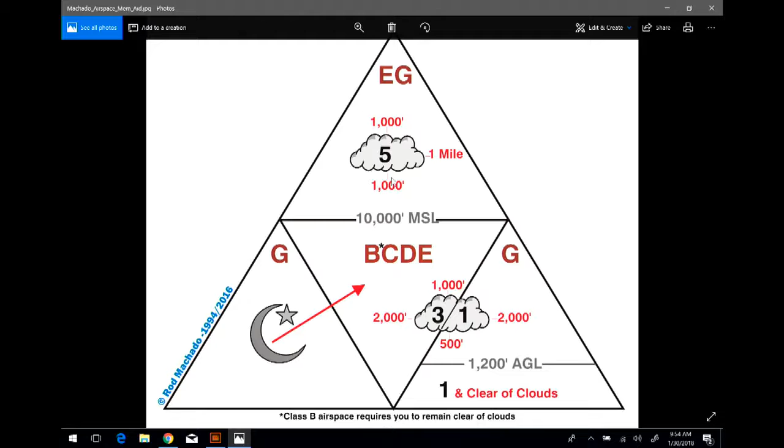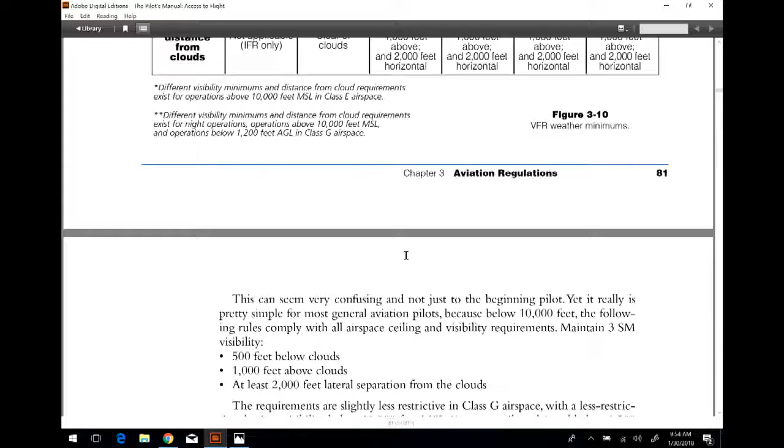So that's the Rod Machado pyramid, you can look at that. Another thing the text does is give it to you verbally - well, I say verbally, but from a text standpoint you can see it there, and just reread it.

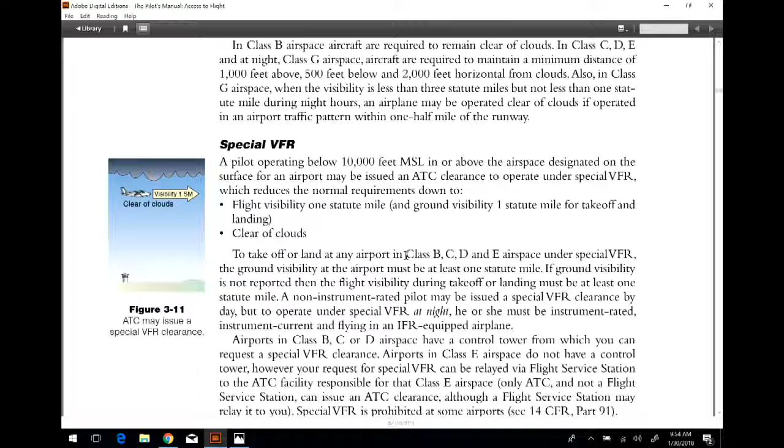Special VFR - remember you have to have permission for special VFR, and you need to know where on sectional charts to look to see if Class Bravo or Class Charlie airspace even offers special VFR, because in some cases it will say no SVFR. Special VFR is a tool of visual flight rules that allows you to get a little bit below the weather outlined in the basic VFR weather minima, to get you in and get you landing.

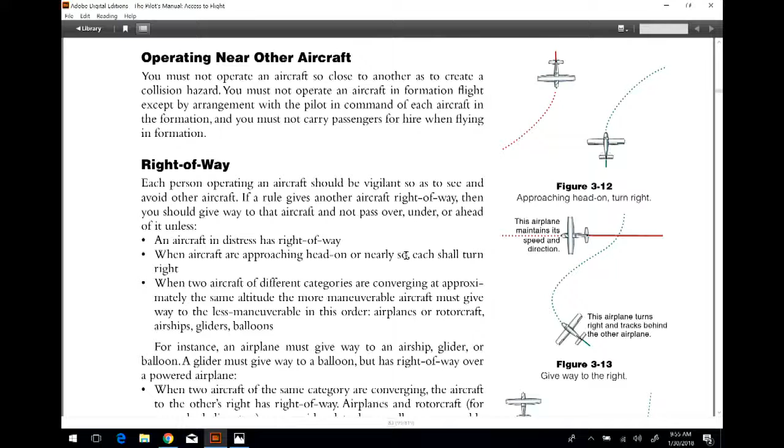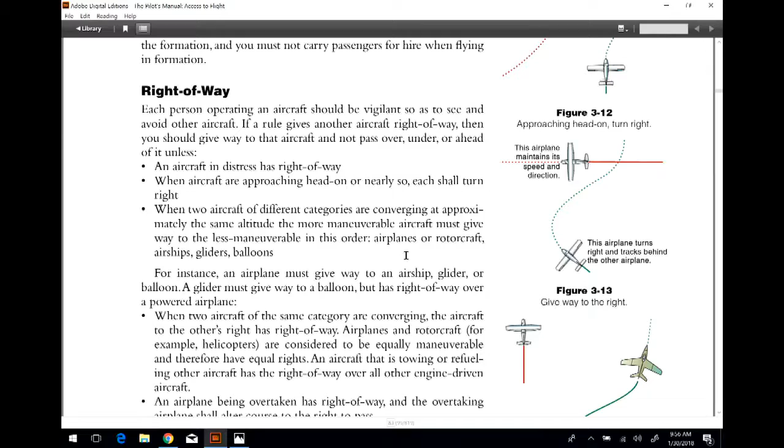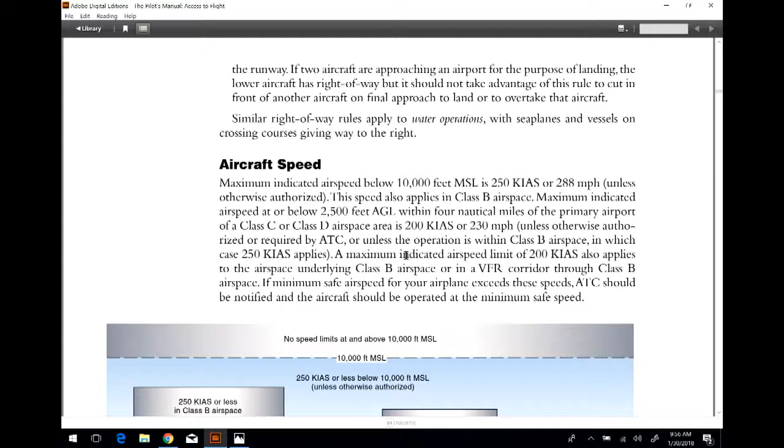It goes through the seat belts - just remember the seat belts. Operating near other aircraft, remember the right of way, and that right of way varies depending on the other types of aircraft you may have out there in your airspace. So read those and review what they are. Remember, there are speed limitations below 10,000 feet MSL, so keep in mind where those are, what the classifications mean, and how they relate to the speed limits.

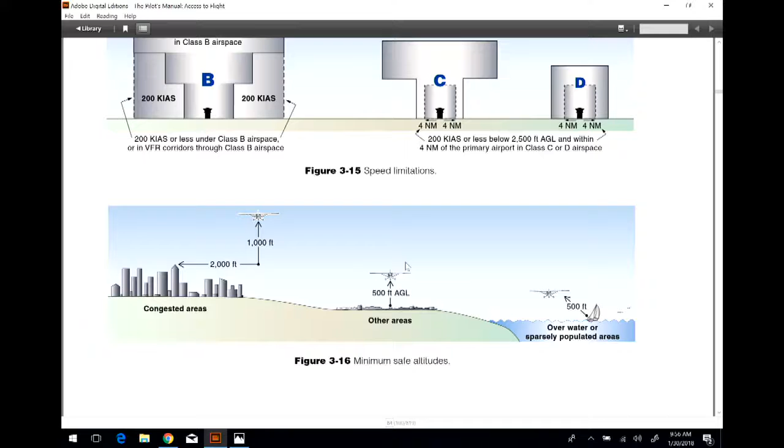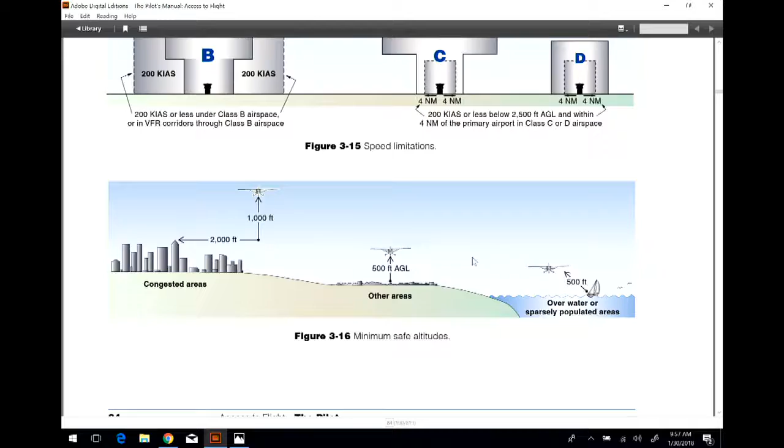Also, you have minimum safe altitudes. Remember that in uncongested areas, wide open spaces, you have to stay 500 feet AGL over the ground, but when you're out over the desert, over open water or things like that, you can go lower. You just have to stay a minimum of 500 feet away from persons or things out there.

I think that just tells you what I was talking about. Guys, I apologize, I just slept so poorly last night. I'm just a mess.

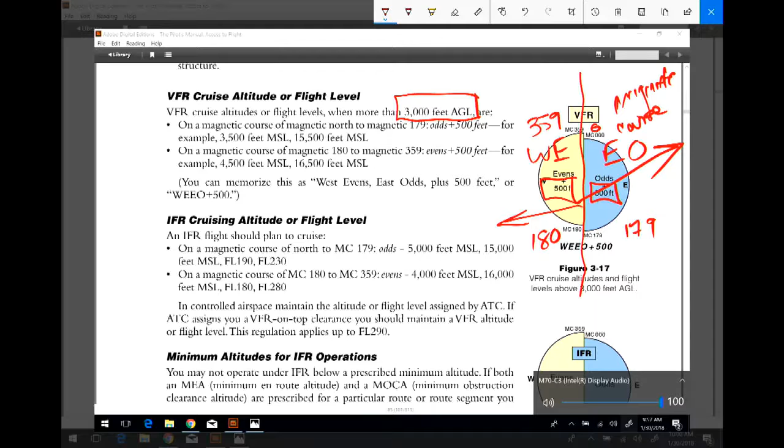On the west side, with a westerly magnetic course here, if your magnetic course—and I said heading earlier, I don't mean heading, I mean your course, your magnetic course—is, let's call it 230, well then that's going to be even. So you're going to be at 8,500, 12,500, 14,500, whatever that's going to be. And remember, it has to do with magnetic course.

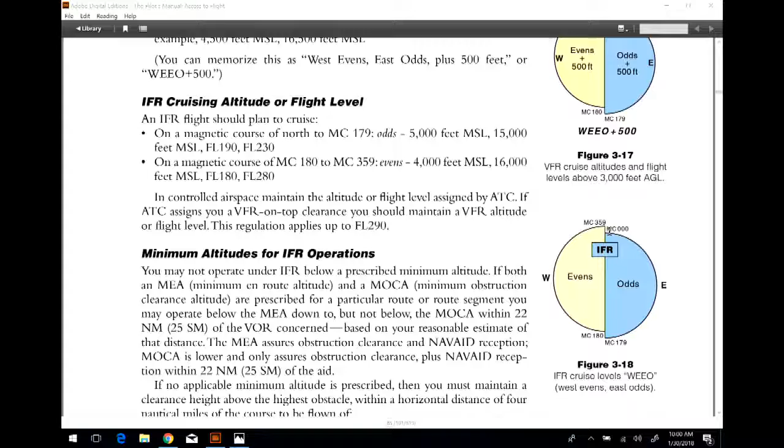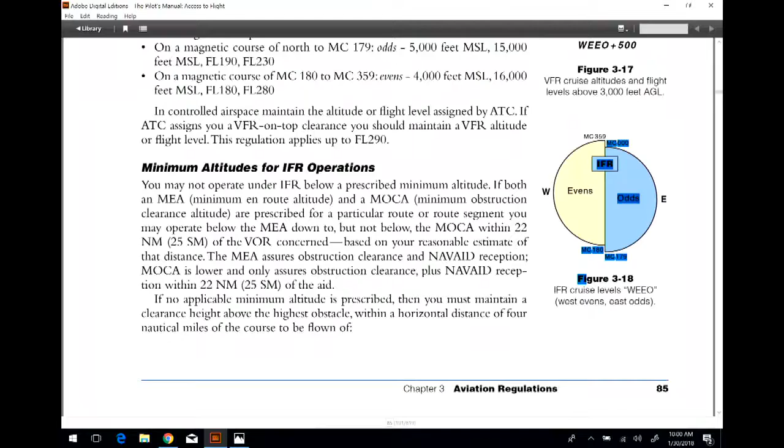The same thing applies for IFR, but the difference is that with this, there's no plus 500 feet. It's going to be rounded to those thousands. So a magnetic course of 080 is going to be at 5,000 feet, 7,000 feet, 13,000 feet, because it'll be odd. A magnetic course of 270 is going to give you 4,000 feet, 8,000 feet, 14,000 feet, something even.

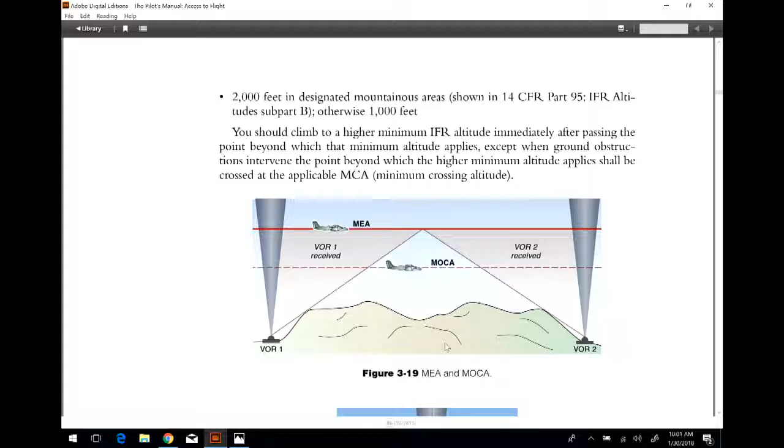Wouldn't this be a great video, just to publish? I'm so entertaining.

We covered this again, the acronyms for a lot of the primarily IFR type conditions: MEAs, minimum en route altitudes, minimum obstruction clearance altitudes, and know the difference. The MEA is going to get you up where you'll have navigational reception and clear any obstacles. The MOCA is going to clear you of the obstacles, however, you may not have the ground-based radio navigation guidance that you thought you might have.

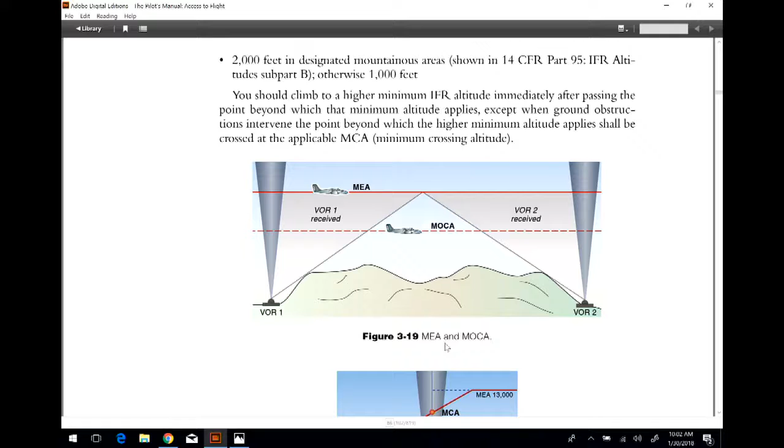There's going to be a period where you can, and in this particular case most certainly will, lose your VORs because remember, VOR is line of sight. That's kind of how that reception piece works. So if the box in your airplane cannot see that station, you're not going to get the signal. That's something you have to be aware of.

Then you have MCAs, minimum crossing altitudes. At this point, you may have a fix established above, in this case, a VOR, and you have an MEA of 6,000 feet, but you have to cross that particular fix at 9,000 feet, and that will establish you up to the next level of the MEA at 13,000 feet.

The reason these things are important is because you see this a lot in our part of the world as you're flying from the flatlands up to the high granite. So those are things you really have to pay attention to—those minimum crossing altitudes of these fixes.

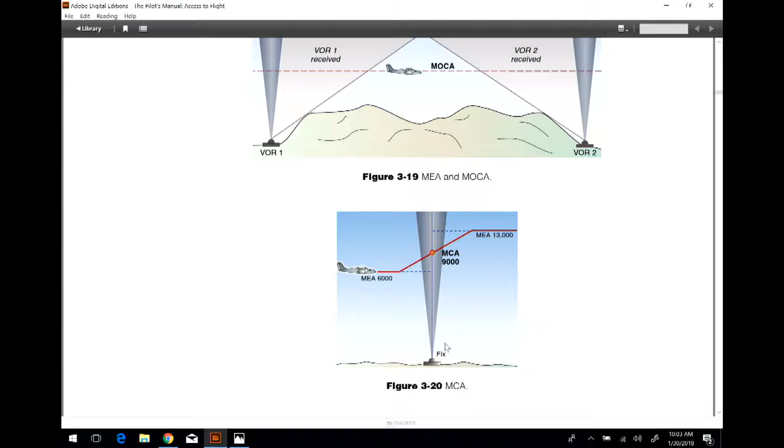I've got to figure out why this thing is going so slow. This was happening this morning, and I'm not sure what the heck is going on here with these things.

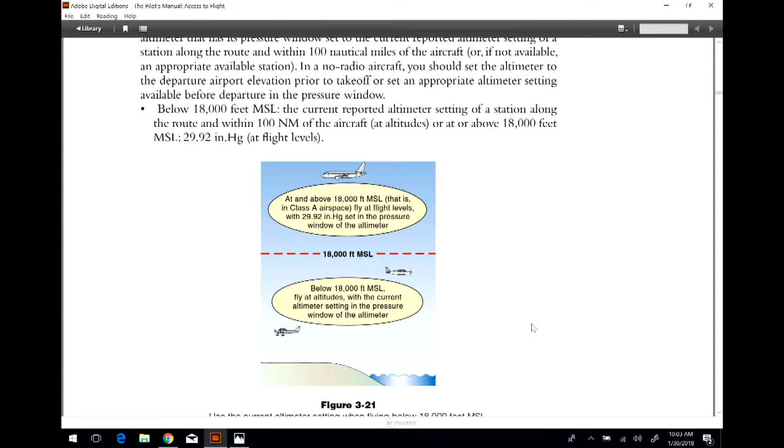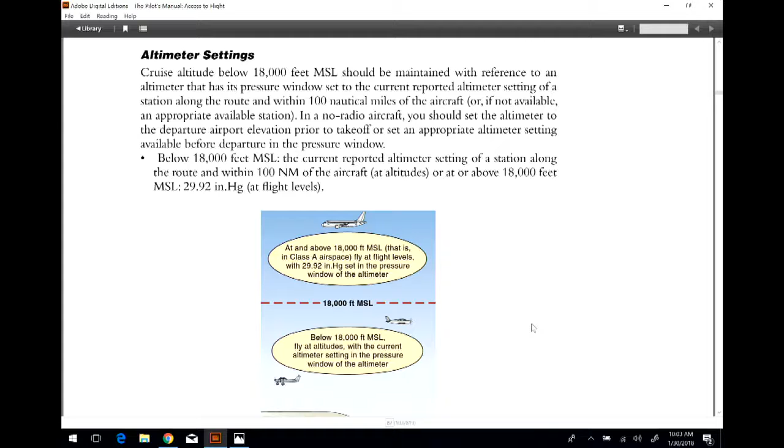But this goes in here. This talks about your altimeter settings, kind of why we switch to 29.92 on our altimeter settings when we're in Class Alpha airspace. And it talks to you about that. We've talked about that before. The course to be flown, we've talked about that.

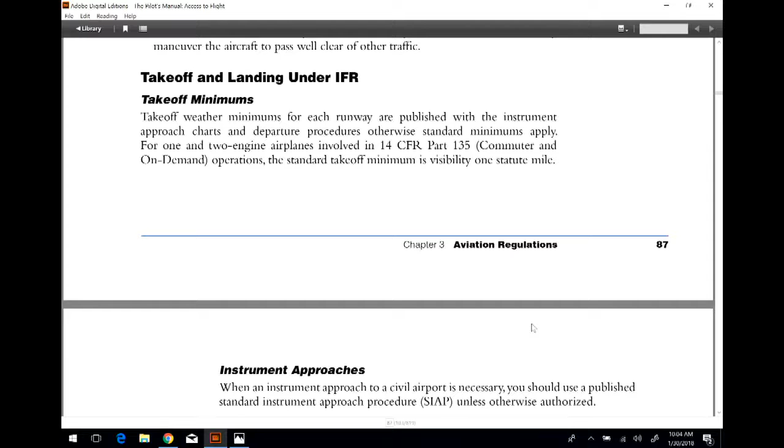Takeoffs and landings, you can look at the takeoff minimums here. It's kind of interesting because the takeoff minimums for Part 91, like people like us, they don't necessarily really apply. But my philosophy is that the big boys, all of the 135, 121, 125, all of those guys, they do have a certain minima that will keep them on the ground. And so even though in Part 91 we don't have those restrictions, my way of thinking is, if Boeing ain't going, I ain't going. It's kind of one of those things.

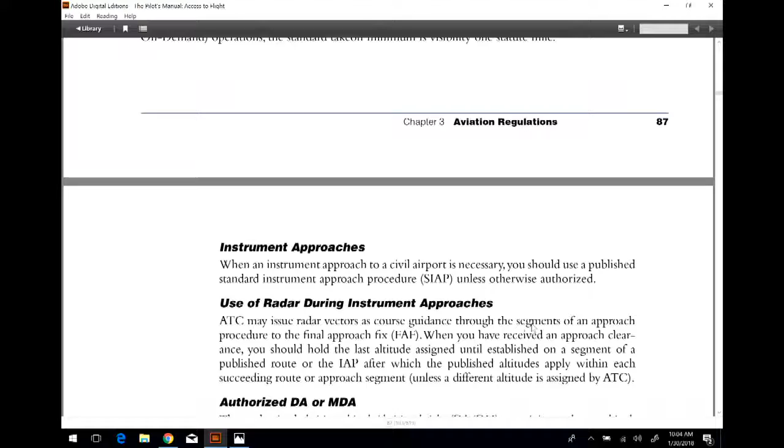Instrument approaches, we'll talk about those here. Again, this goes back through some of the other approaches and what some of the rules and regulations are for these. And it'll be a review for you on what applies to what.

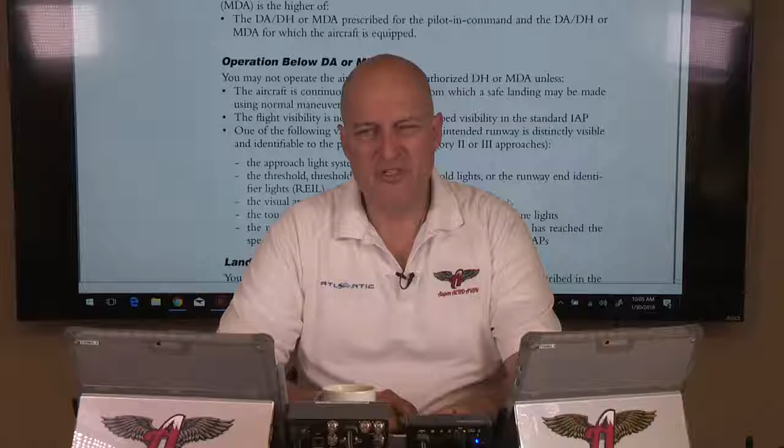Remember, there are actually 11 different things that you as pilot in command must be able to visually spot before you can descend below the DA of an approach. Most of the times that you get down to your decision altitude with a precision approach, just remember decision altitude, DA, DH, those are primarily talking about the precision approaches, whereas MDA, that's going to be a non-precision approach. So you have the DA, decision altitude or decision height, versus a minimum descent altitude, MDA, for a non-precision approach.

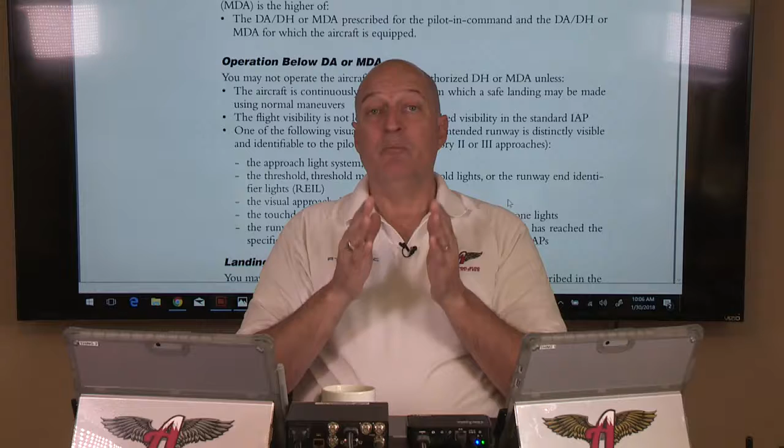So when we're looking at these precision approaches, remember that in most cases a precision approach will get you down to 200 feet off the deck. In order for you to execute that approach, you must make out the airport and have the runway at 200 feet, or you also have to at least see the approach lighting system, which will allow you to descend an additional 100 feet, getting you down to 100 feet off the deck. But you've got to be able to see that.

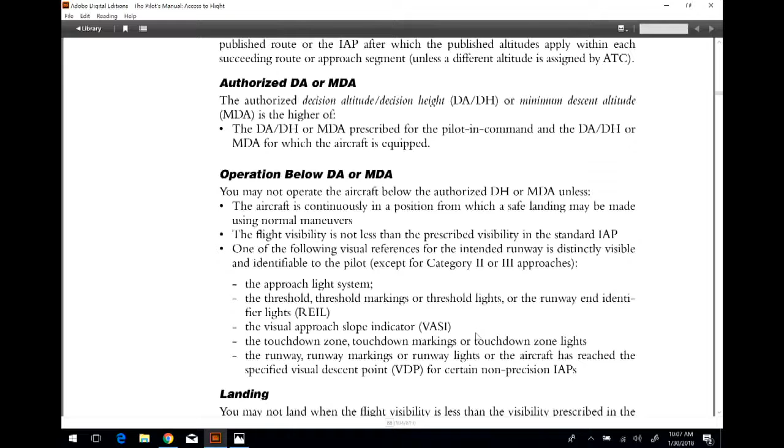And in order for you to land, again, you have to be able to identify one of these things - there's 11 different things for you to be able to actually land that airplane and not execute a missed approach.

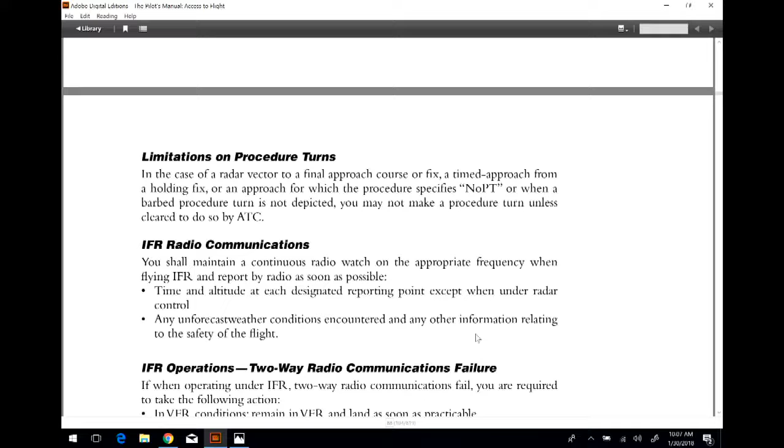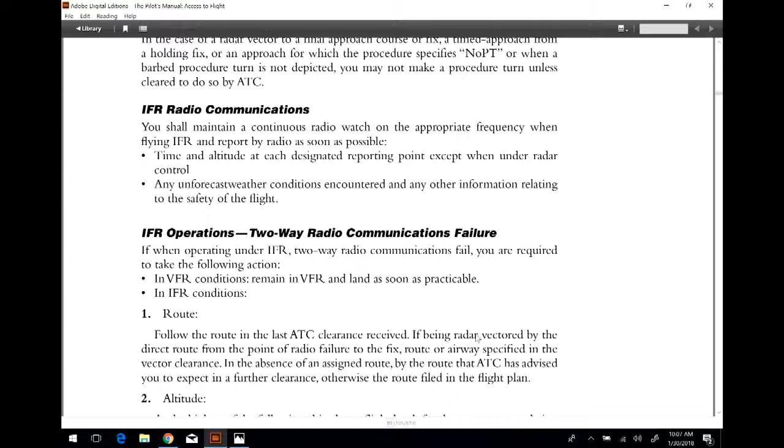I am struggling, people. I am struggling. I am looking here. And I apologize, I was distracted because it's just such a long story. I'm not even gonna get into it. We have a problem with Sebastian, our 11-year-old golden retriever. Normally I put the dogs away whenever I'm doing these broadcasts. This one, however, I did not, and I'm ruing the decision not to do that. But he's having problems, so.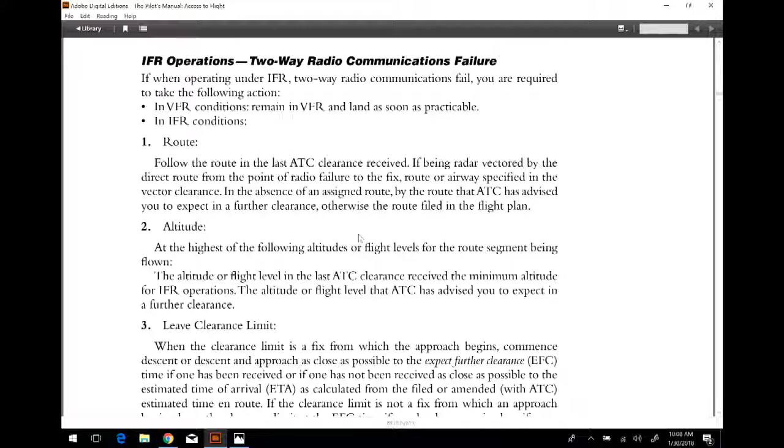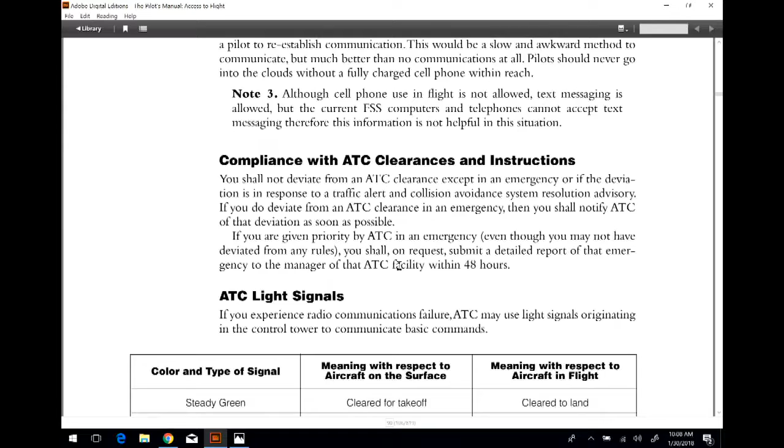You can look here and review what has to happen if you have certain failures. For instance, if you lose radio communications, understand what has to happen there should you have a radio failure. Complying with ATC clearances, a review of the ATC light signals. Of course, it depends on if you're on the ground or in the air.

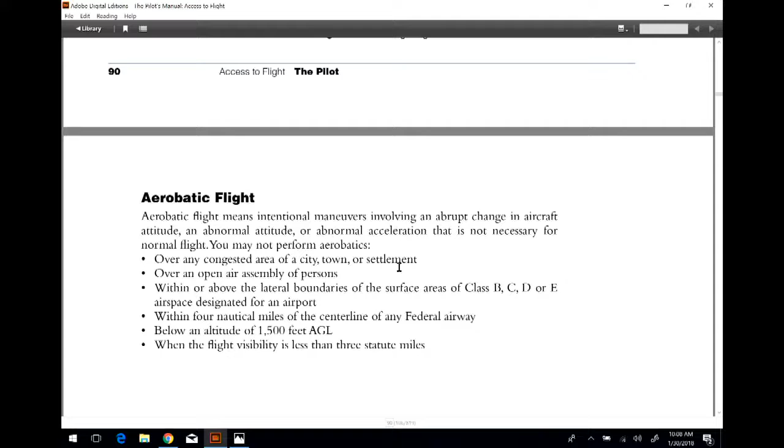The rules for aerobatic flight. So again, you've got to be above 1,500 feet AGL - that's kind of the big one. And that's kind of your aviation regulations.

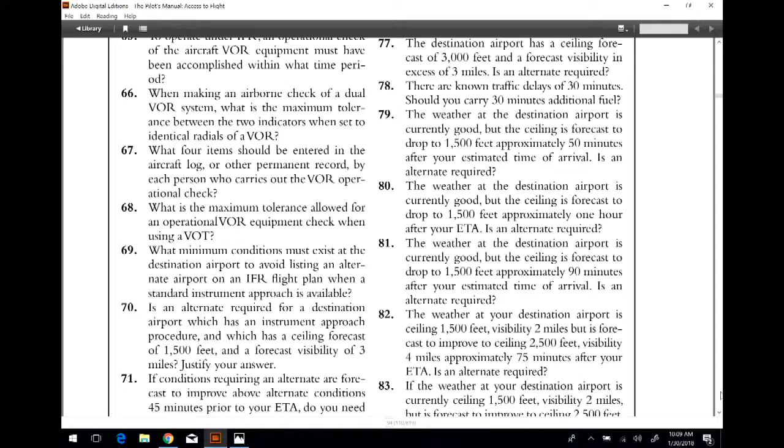Now, the thing about the aviation regulations is that, as I mentioned before, the questions here at the end of the chapter for these sections, especially the regulations section, these would be great for you to go over and review, because it kind of wakes up the information in your head, dusts off the cobwebs for information you've covered many months ago, just to prepare here for what's coming with the commercial stuff.

That's why we do the VFR and IFR review before we get into the commercial, because that commercial stuff has so much of that in it as well.

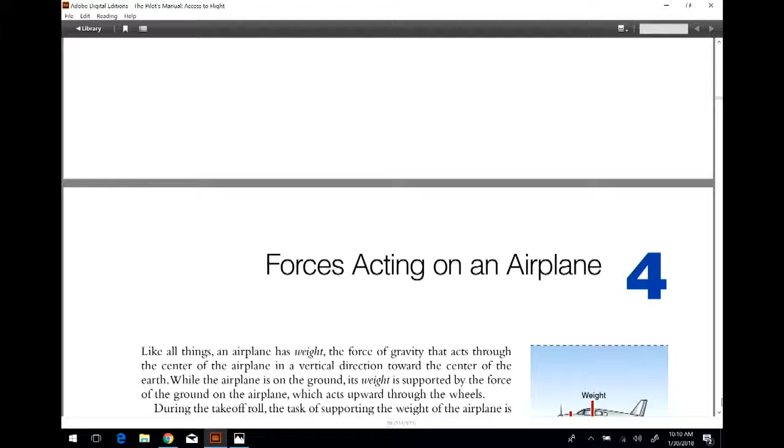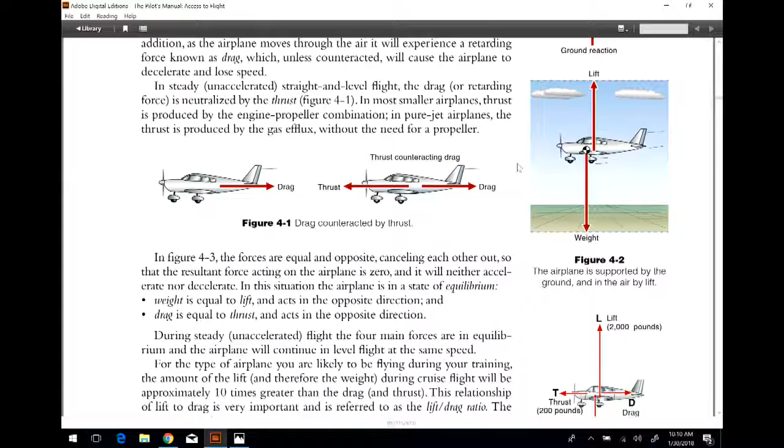We're going to press on here to begin the portion on aerodynamics. Forces acting on an airplane - the review here, just remember lift, weight, thrust, drag. Understand the lift to drag ratio. These are things that we've covered.

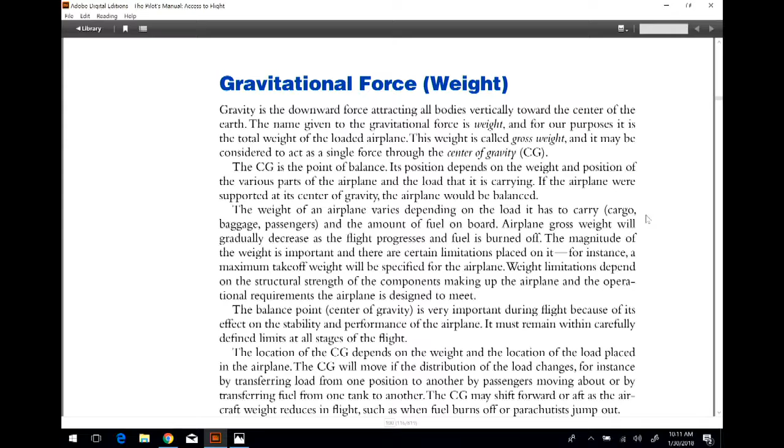We talk about weight versus mass. Some will say mass, some will say gravity. I prefer weight, primarily because when we begin our discussion on weight and balance, we have more continuity with what we're talking about. It's not just a matter of the weight of the aircraft, it's where that weight is distributed in the aircraft itself. That's why when we talk about weight and balance, we break those up - we don't just say weight and balance like it's all one thing, because it's not.

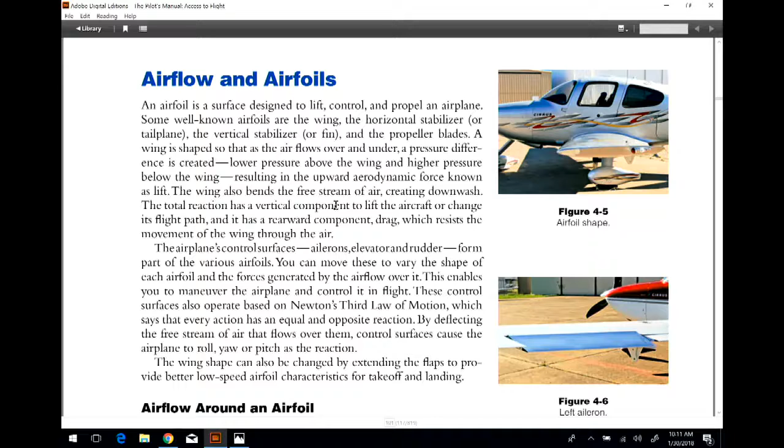Airflow and airfoils - you can take a look at these first two paragraphs. We know that Bernoulli is the one most people think about when they talk about lift of an aircraft, but to really explain lift, you've got to get Newton involved in the equation, you've got to get Coanda involved. So it's sort of the shorthand explanation - we use Bernoulli, but there's more to it than that, and we do get into that more once we get to the commercial side of things.

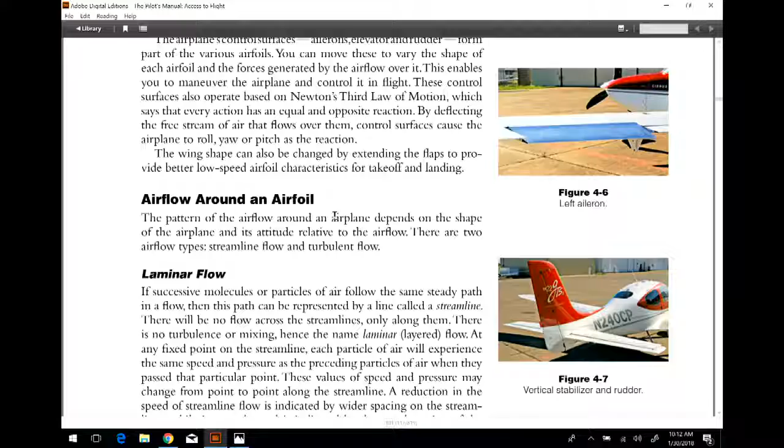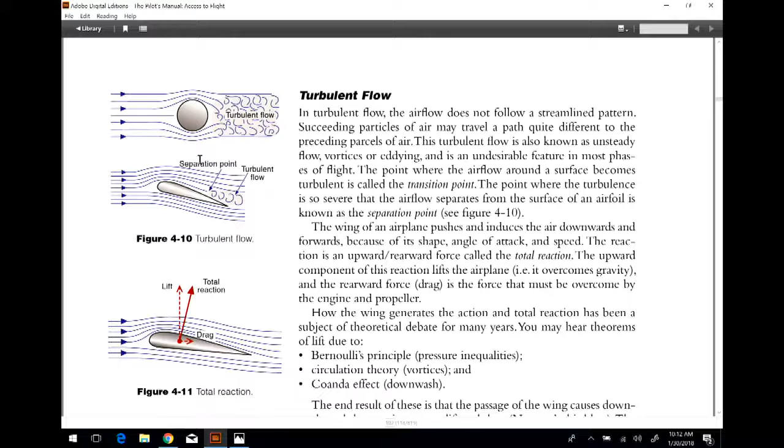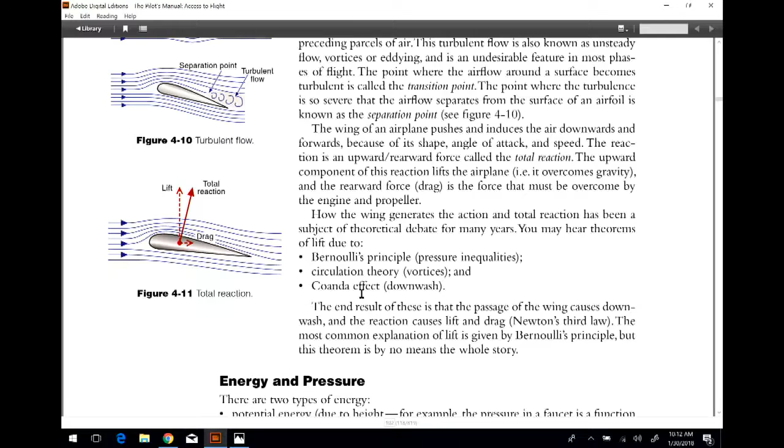Airflow and the airfoil, the review of laminar flow, understand what all the primary and secondary control systems on the airplane are for. This is when we start talking about the airflow, especially when it's flowing around a sphere type of thing. The Coanda effect, we'll talk about that more in the commercial side, but again Newton's third law also comes into play here.

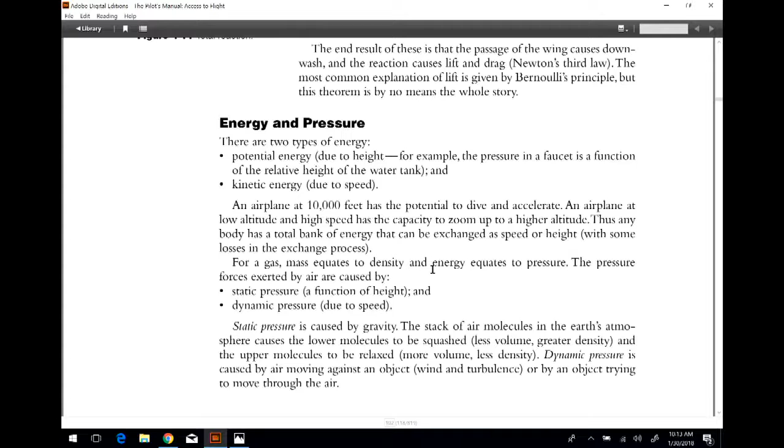Energies and pressures - we talk about the differences between potential and kinetic energies. I think you know what those are, but it's a good review to talk about this, and why altitude is our friend. We kind of talk about the fact that speed is life and altitude is life insurance. There's a reason for that - any time we have an issue with an airplane, it's always good to be able to exchange altitude for airspeed should we need it. It's one of the reasons why, if I'm given the choice, I will always choose to fly on the higher side of anything else, just in the event of some engine failure that might happen.

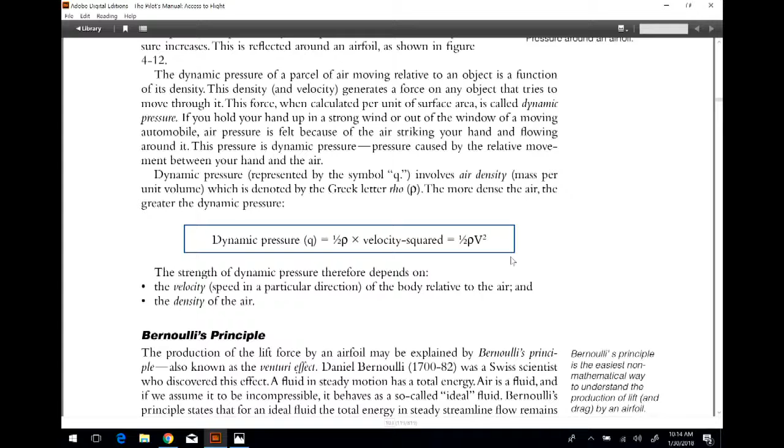So you can read that - this again is just review. I do want you to take special note this time when we look at dynamic pressure and this formula. This is going to come up here in probably about 6 weeks when we start getting into more advanced aerodynamics in the commercial class, so just keep that in mind.

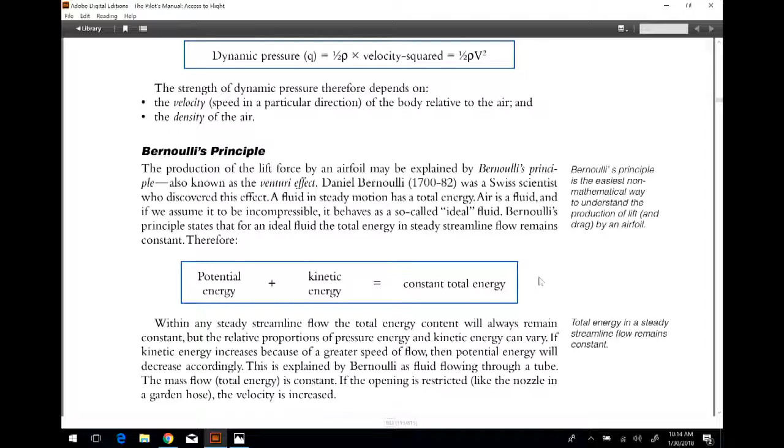Bernoulli, again we've talked about this also ad nauseum - Bernoulli and his Venturi effect and the study in pressure differential, dynamic versus static pressures. You can look at this again. Now it goes into lift and thrust and airspeed.

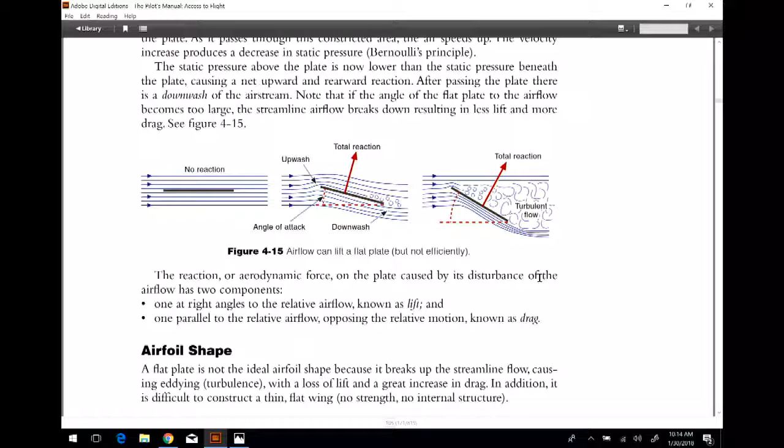Again, review, review, review - different types of airfoils, how they work, why they work. Airfoil shapes, knowing that most aircraft, especially training aircraft, are going to be a cambered airfoil versus a symmetrical airfoil. This is something you'll find in aircraft whose mission requires greater maneuverability, but just understand the give and take. In a cambered airfoil, you're going to have more stability and probably less performance. In a symmetrical one, you're going to have more performance but less stability.

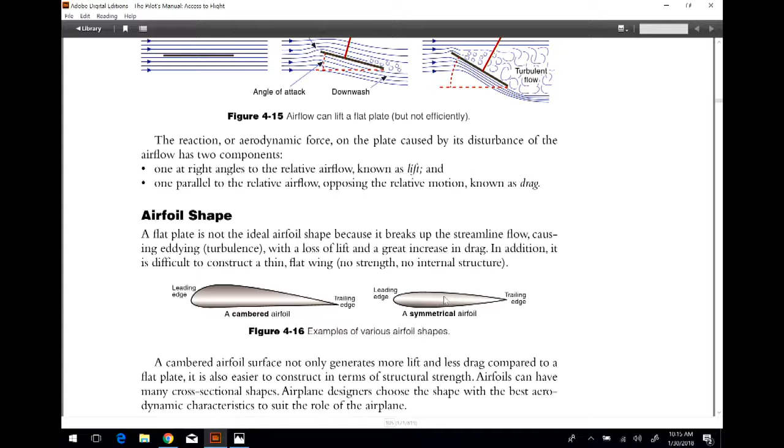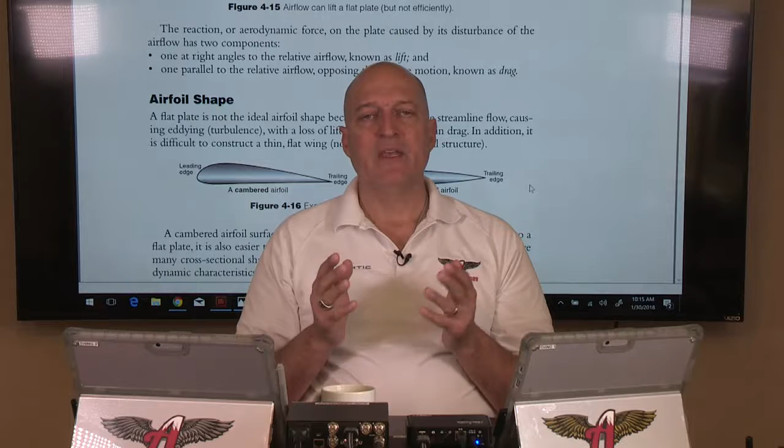The big thing is understanding that when you look at these basic principles of lift, weight, thrust, and drag, any time you design something to get more out of one side, you're giving up something on the other side.

You know that there's one time when you have equilibrium, and that's when you're in steady, level, unaccelerated flight. Any other time you alter that equation, in order to gain something over here, you have to give up something over there. That's just the way it all works. So as you make decisions with regards to design, performance, or mission, know what you're giving up in order to accomplish that. Just bear that in mind.

Camber, we can go back to Orville and Wilbur with regard to camber. Understand what the camber is, the chord line, mean camber. That'll come back to you here.

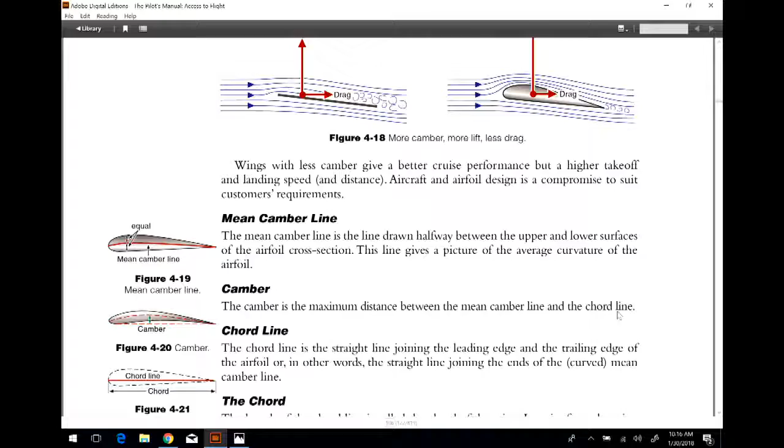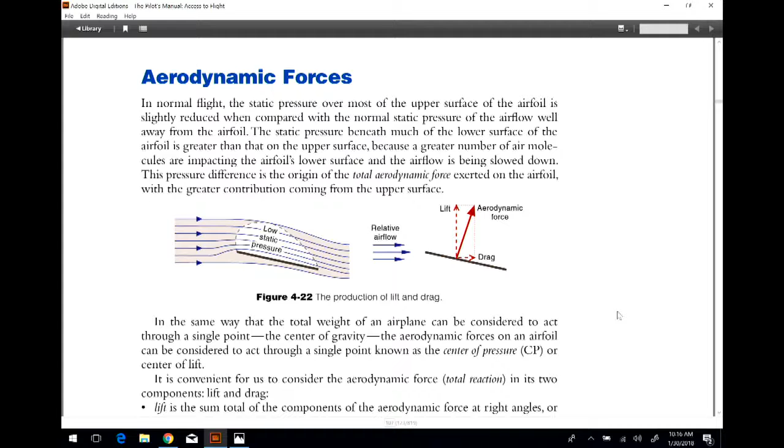Aerodynamic forces. Again, we look at Bernoulli. We talk about the differences with regards to pressure differential. A lot of people assume the reason an airplane flies is because of some form of impact pressure underneath the lower portion of the wing surface, and they don't understand the lifting action created by the pressure differential flowing over a cambered surface versus just dynamic impact air hitting the wing from below. There is some of that happening, to be sure, but it's not sufficient to create lift.

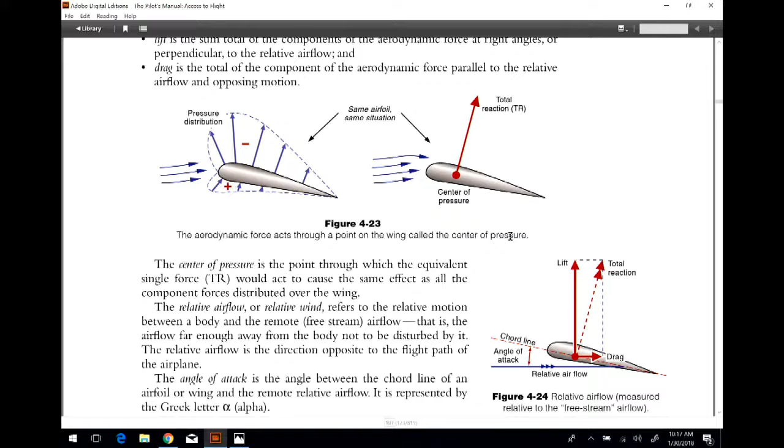We talk more about that in the more advanced aerodynamics when we get there on the commercial side of things. Relative airflow, and when we look at this, chord line, angle of attack, just remember what all of that is.

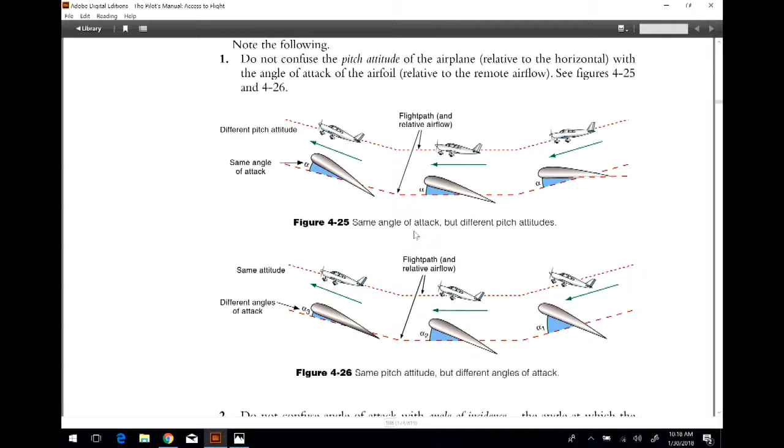This is something that conceptually confuses people sometimes: confusion between the pitch attitude of an airplane and the angle of attack of the airfoil. As you're transitioning between certain phases of flight, say going from level flight to a climb, there's an initial area between the time you add power and begin the climb, a transition where the rules don't apply the same way. Once you're established in that climb, your relative airflow is going to be different than when you're just beginning the transition between level flight and a climb. Same could be said for a descent. That's what they're showing you in this illustration in 4-25 and 4-26.

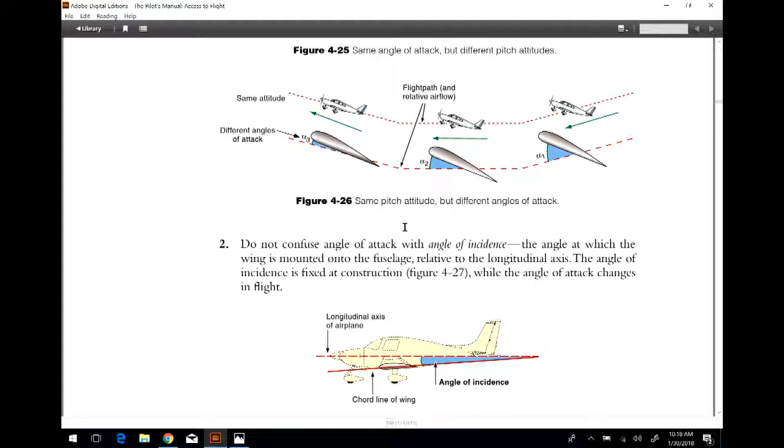Know the difference between angle of attack and angle of incidence.

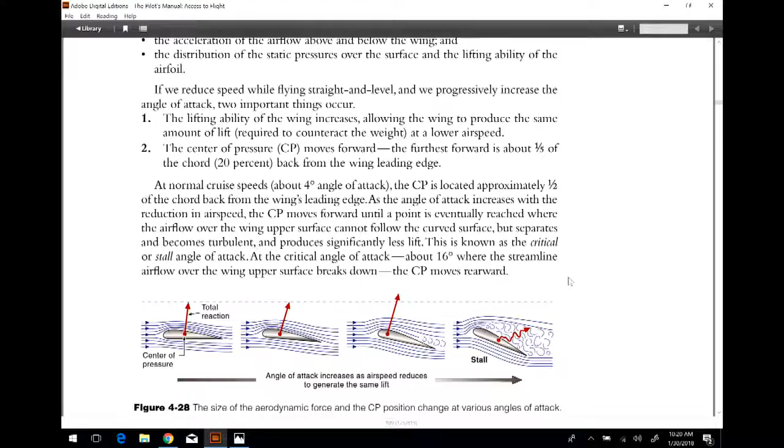Where does the center of pressure go given the angle of attack? Your center of pressure, as your angle of attack increases, moves closer to the leading edge of the airplane until that point where you reach your critical angle of attack. Then your center of pressure will slide back to the back half, depending upon the actual camber of the airfoil, where you just begin to lose that lift. The critical angle of attack in most aircraft is going to be around that 16-degree mark. It may be a degree or two north or south of 16 degrees for a particular aircraft, but generally speaking, that's what we look at for the critical angle of attack.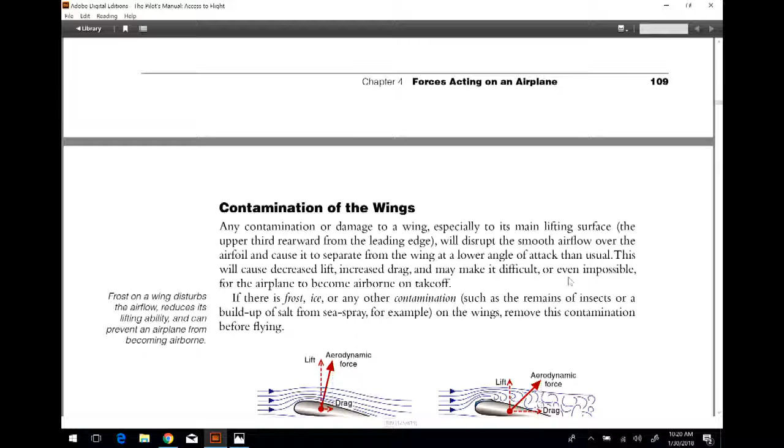Wing contamination, we'll discuss this more when we talk about icing and frost. But any contaminant that prevents laminar flow over an airplane—we talk about the fact that a clean airplane is a fast airplane, and it's quite literally true, because the airplane wants to be slippery, and the more slippery it is, the better it performs. If you've got a bug-encrusted airplane, you're going to lose some knots. It's not just a performance element, there's also a safety element, because with all those bugs on the leading edge and possibly extending toward the cambered area of your wing, now you're a test pilot.

I can promise you that the men and women who test these aircraft for certification don't go out there with nasty looking airplanes. These airplanes are normally brand new, with new engines, super clean. That's where these performance numbers come from. If you have contaminants on the wing, you're a test pilot, and probably not on the side of that equation that's going to be a lot of fun. I'm not saying it won't be exciting, but it's really not where you want to be. So keep that machine clean.

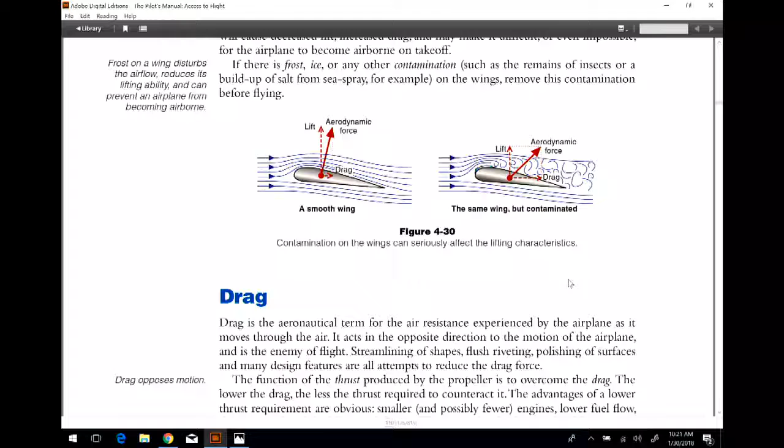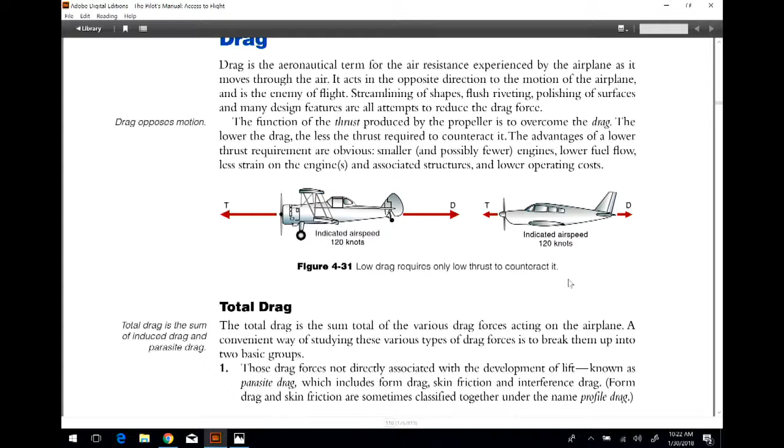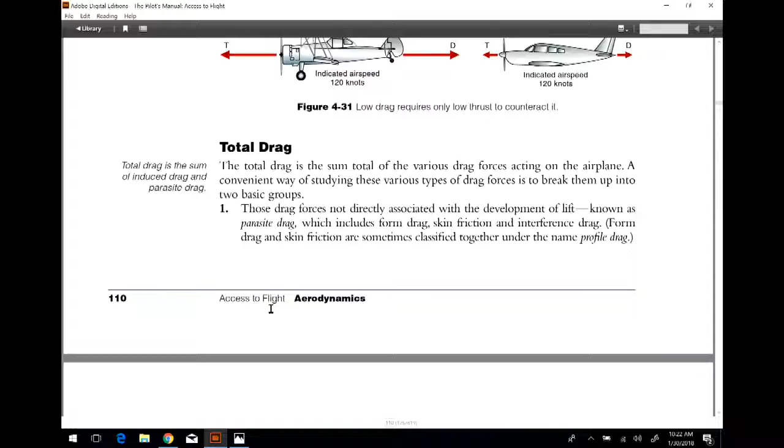Drag is that force that opposes thrust. Remember the different types of drag we have: total drag is the sum of induced drag and parasite drag, or parasitic drag. On parasite drag, there are several different types: skin friction, form drag, and interference drag. Review what these are.

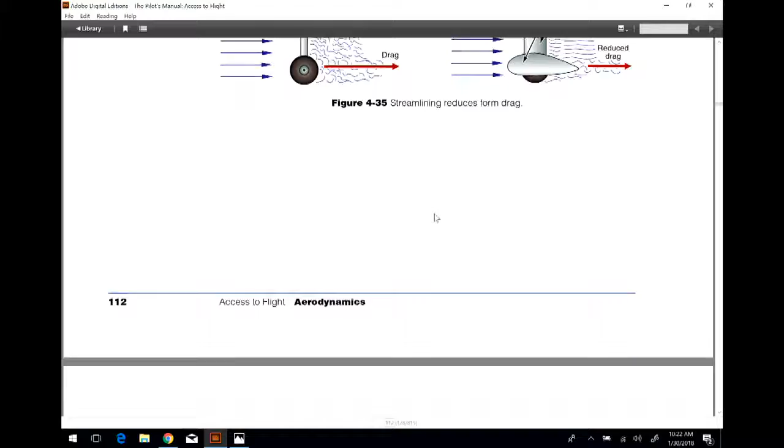On induced drag, we'll get past all of these things because you'll go through here and figure this out.

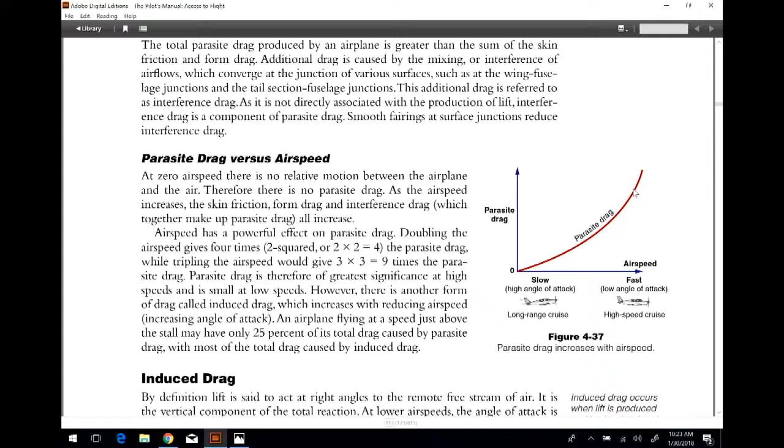Remember that on parasite drag, the faster you're going, the higher the parasite drag. The more all of those things like skin friction and form drag, you start paying a penalty for those the faster you go. It becomes a point where you're paying so much for that increased speed, with regards to either a bigger engine and greater fuel consumption, that at some point it just becomes a losing effort for any form of efficiency that you have.

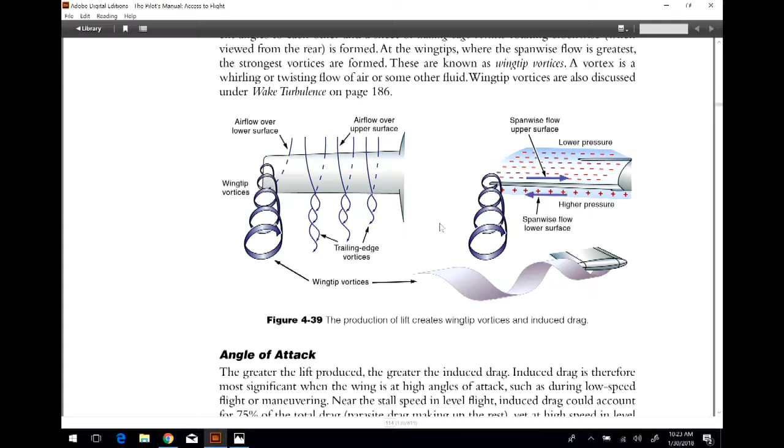Induced drag, remember, is induced by the pilot. That's when the pilot changes the angle of attack, creating drag on the airframe based on the angle of attack. We look at vortices here also, so you can look at the wingtip vortices, these things that happen. Just remember that the vortices created off this airplane can also be dangerous.

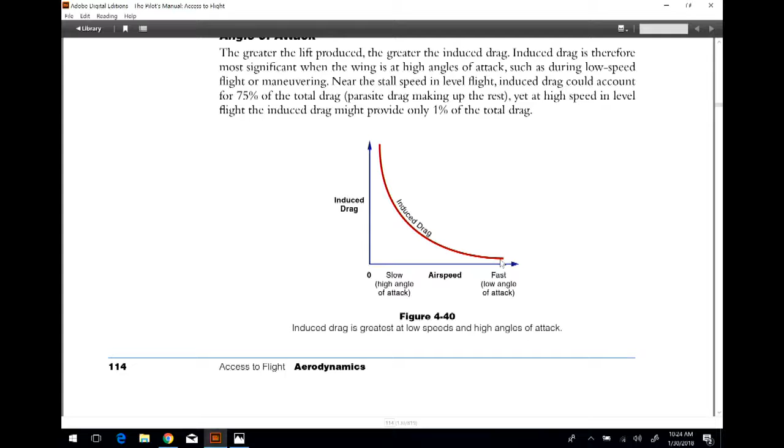You'll note the angle of attack here, and you'll also notice that with induced drag, the actual drag component becomes less the faster you're going, because the faster you're going, the more you're flying a flatter airplane, and your angle of attack is relatively minimum with that. That's where you wind up with less induced drag.

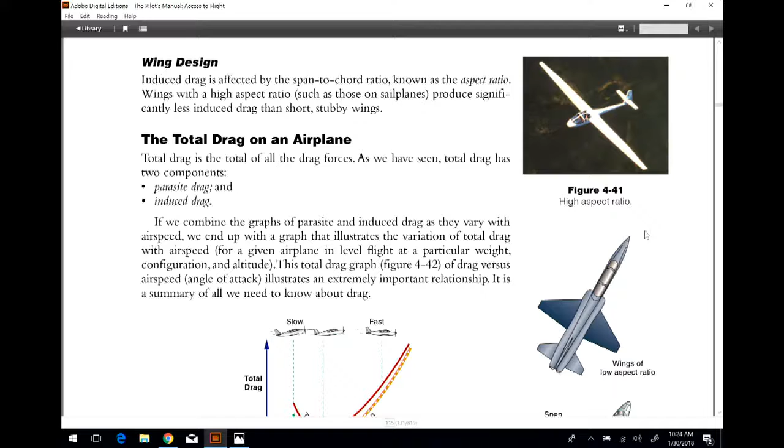Wing design: high aspect ratio versus low aspect ratio. Diamonds are definitely an example of high aspect ratio wings like you might find on a glider, versus low aspect ratio wings that you might find on a jet fighter. Again, for everything like this, you gain something here, but you lose something here, and that's sort of the same thing that happens with this wing design.

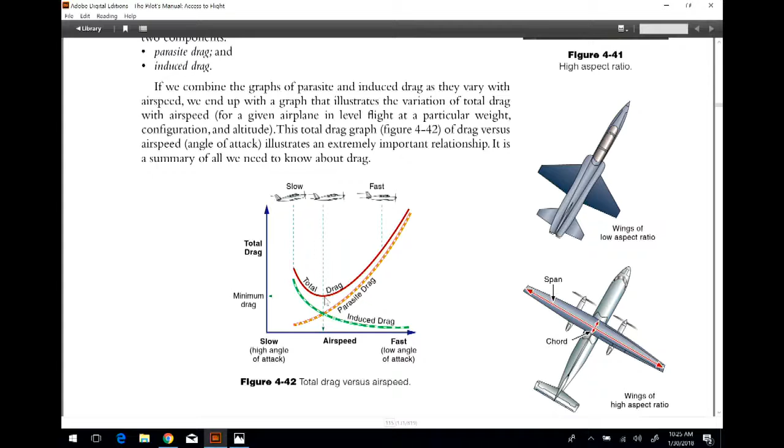The one thing I want to show you on figure 4-42 is this reminder: you're going to find this area where these two lines of parasite drag and induced drag cross at this point. This is a point where, when you look at the total drag of this aircraft, you meet this minimum drag part. This minimum drag part is where, within a couple of knots, you will find your best glide speed. That's about where this comes from. We look at this more in depth on the commercial side of things.

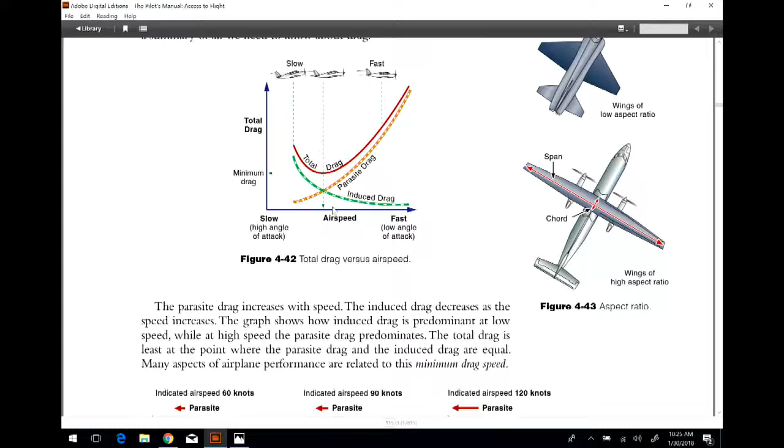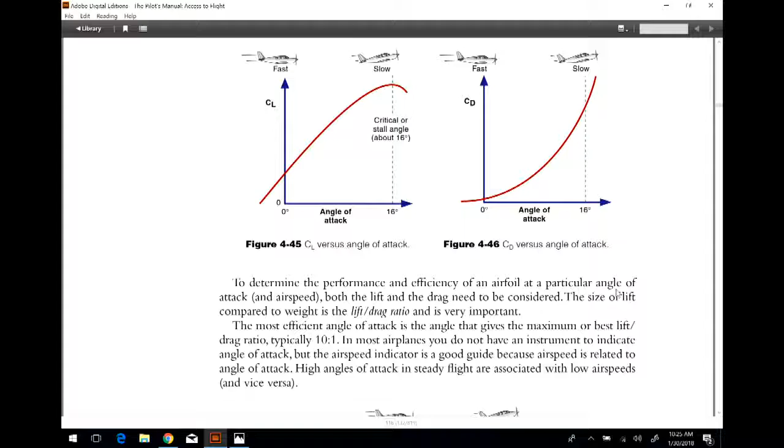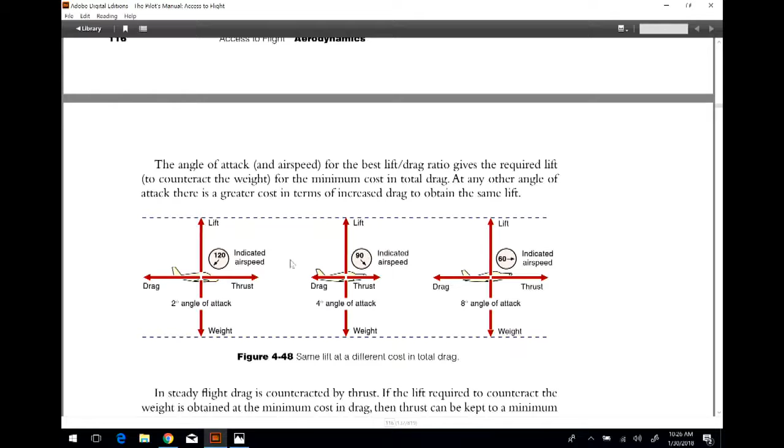You can look at this, the lift-drag ratio. This is something else we go over more in depth in about 6 weeks or so. Again, lift-drag versus angle of attack. You can see the angles of attack here for given airspeeds, and these are the things that we'll see. You look at these lines and these vectors, because the vectors here are also showing the difference of effect in where you may be. This one is showing basically the angle of attack versus a given airspeed.

We'll pick this up here with wing flaps on our next broadcast.

There you go. Again, I apologize for all of this, but I'm just glad you're not in the same room with me, because nobody needs that. Thank you very much, and I keep saying I'm just such an idiot. I will try to end this here. This is always the entertaining part, because anytime my phone does something goofy, it keeps me from actually shutting off the broadcast, and I've got to get that figured out, because that's just intolerable.

So, thank you very much. Pick this up here on wing flaps.